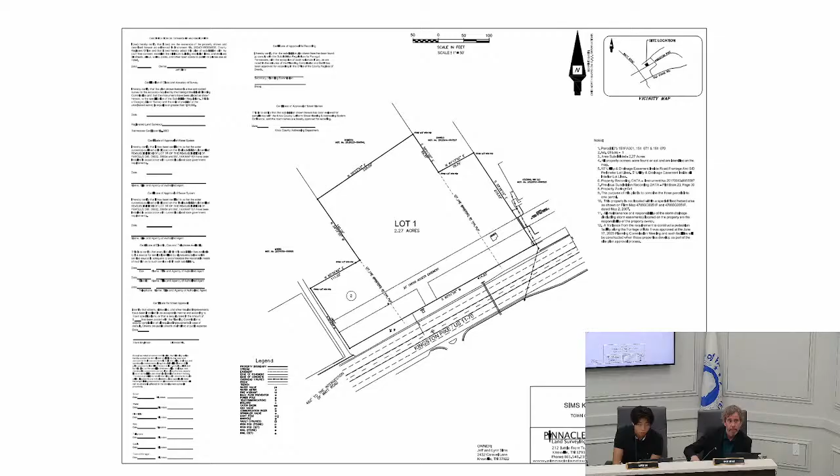Motion to approve. Do I have a second? Second. Is there any public input? No, ma'am. Any discussion? Yes, the owner is aware of what we're doing here? Yes, sir. Do you need him to come up? Well, as long as he understands it, that's all that matters. Do you understand what we're doing? Okay.

Any more discussion? All right, with discussion closed, all those in favor say aye. Aye. Any opposed? Motion passes.

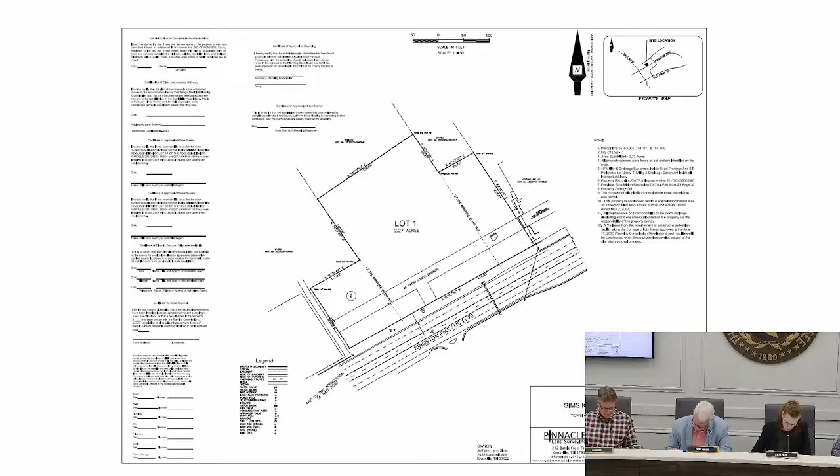Item 4B, discussion and public hearing on approval to extend fiber optic cable in a new 2-inch conduit within the right-of-way beginning at the northeast intersection of Kingston Pike and North Campbell Station Road, extending along the east side of North Campbell Station Road, boring under the road to the west side, continuing to Jamestowne Boulevard, and along the south side of Jamestowne Boulevard to service the property at 11507 Kingston Pike. Comcast applicant. That's a long caption for that item, but it pretty much describes what they're doing.

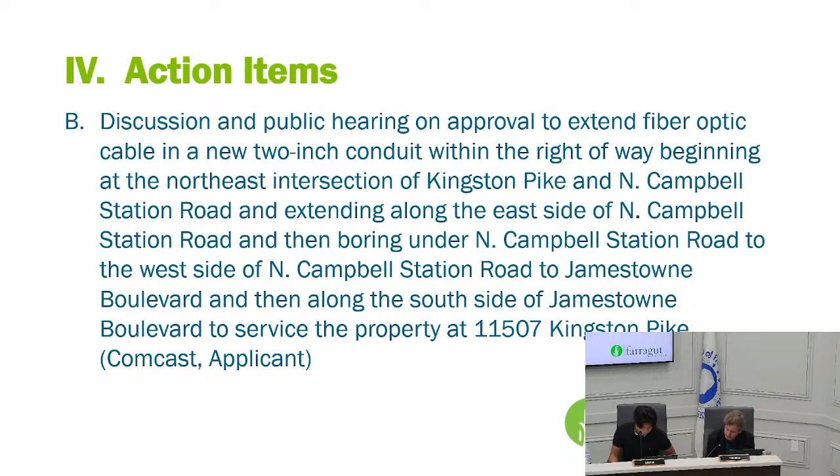Basically, Comcast, through Source Broadband as their installer, for whom we have a letter of credit, will be extending about 1,900 linear feet of half-inch fiber cable. It will start at the northeast intersection of Kingston Pike and North Campbell Station Road, go along the east side of North Campbell Station Road down near the Rural Metro facility, cross under the road, continue on the west side up to Jamestowne Boulevard, run along the south side of Jamestowne Boulevard, and come in from the north into the Village Green Shopping Center to service 11507 Kingston Pike at this time.

So the staff recommends approval of this project subject to obtaining a right-of-way permit through the town's engineering department. And I'll be happy to answer any questions if you have any.

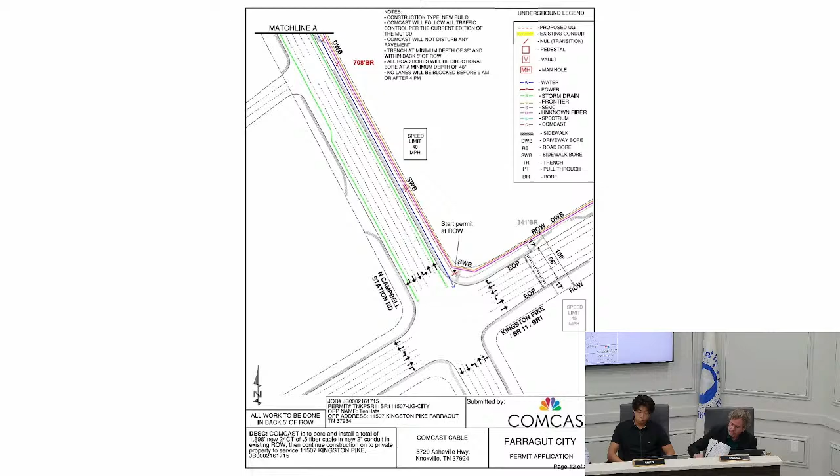Move to approve the item with the subject-tos. Do I have a second? Second. Any public input? No. Any discussion? Yes. Mark, have we used this Source Broadband before? Yes, we have, with good results as far as I know. Okay. Like I said, we have I think it's a $30,000 letter of credit, and any of these installers have to provide that before they can get a right-of-way permit, and that gives us the assurance that any areas that might be affected by their project get properly restored. Okay, just want to make sure.

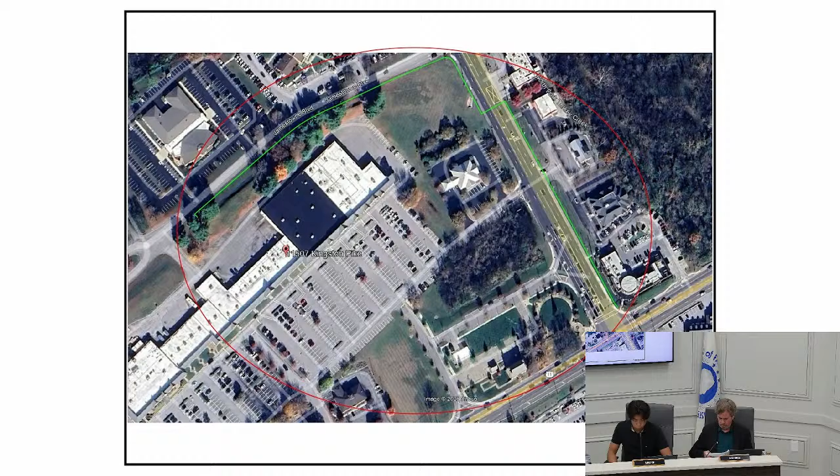Is that the complete discussion? All those in favor say aye. Aye. Any opposed? Motion passes.

Moving on to item 4C, discussion and public hearing on the approval to extend fiber optic cable from the west end of Boyd Station Road along the east side of McPhee Road to the entrance to the Grove at Boyd Station subdivision. Charter applicant.

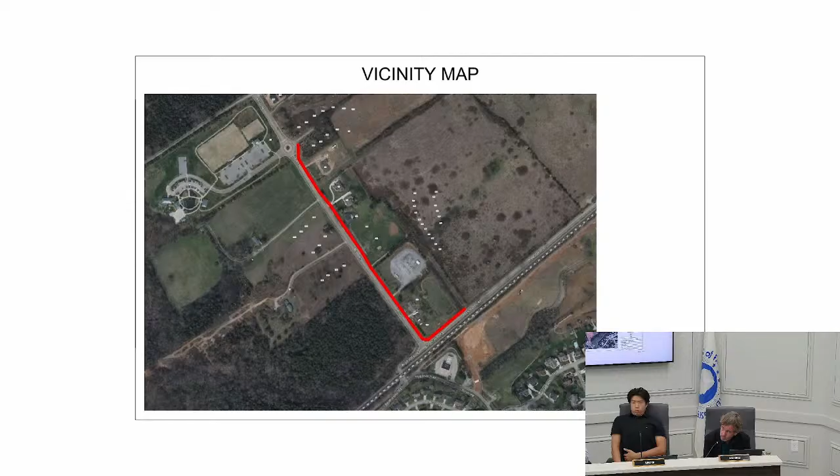This particular project will start at the northeast intersection of Boyd Station Road and McPhee. It'll come in on the north side of Boyd Station Road, then all this is in the right-of-way along the east side of McPhee Road, all the way up to the entrance to the Grove at Boyd Station subdivision. It's about 2,200 linear feet of fiber optic cable. This would be for Charter, using MasTec as their installer, for whom we also have a letter of credit. All this work will be conducted through directional boring.

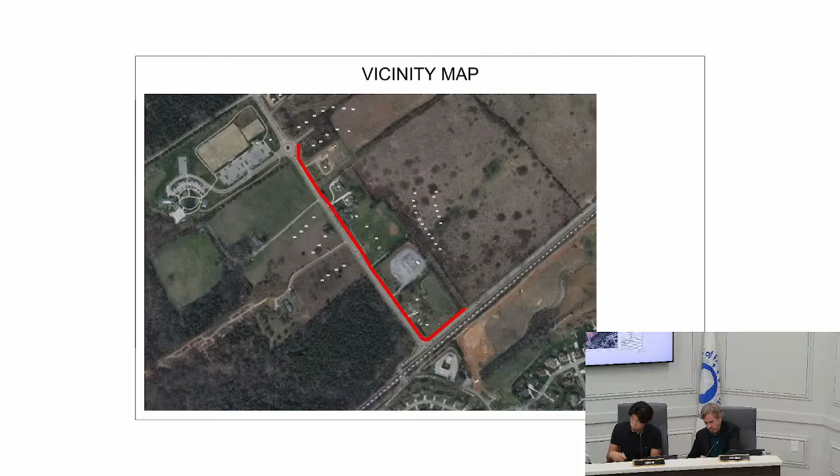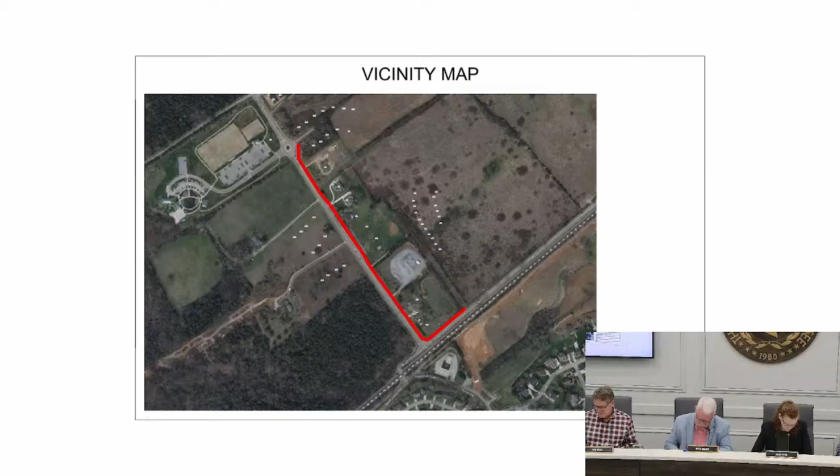So the staff recommends approval of this project subject to obtaining the right-of-way permit through the town's engineering department. Do I have a motion? So moved. Second. Do we have any public input? No. Any discussion? None. All those in favor say aye. Aye. Any opposed? Motion passes.

All right, moving on to, D's guns... no, yeah, E. D was E. 4E, discussion and public hearing on approval to extend a 4-inch gas main along the north side of Allen Kirby Road and extend a 2-inch gas main along Allen Kirby Road to service 12960 Allen Kirby Road, KUB applicant.

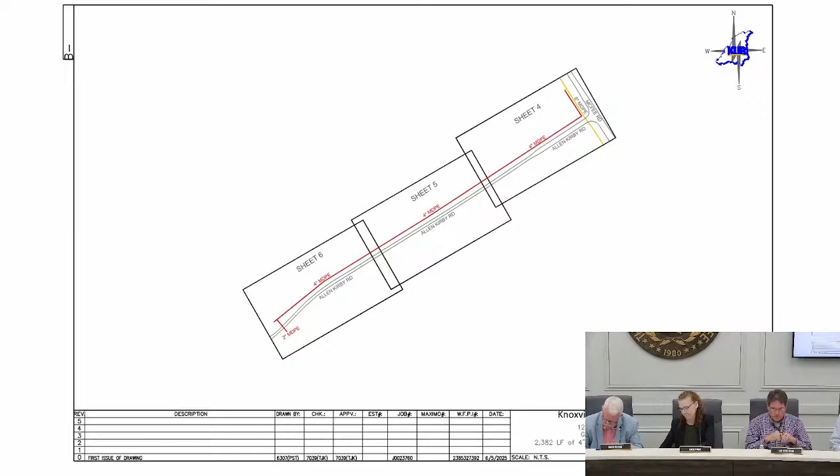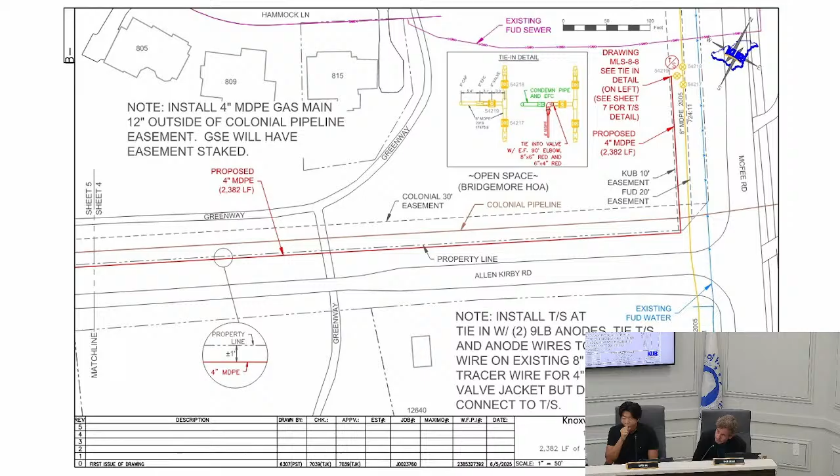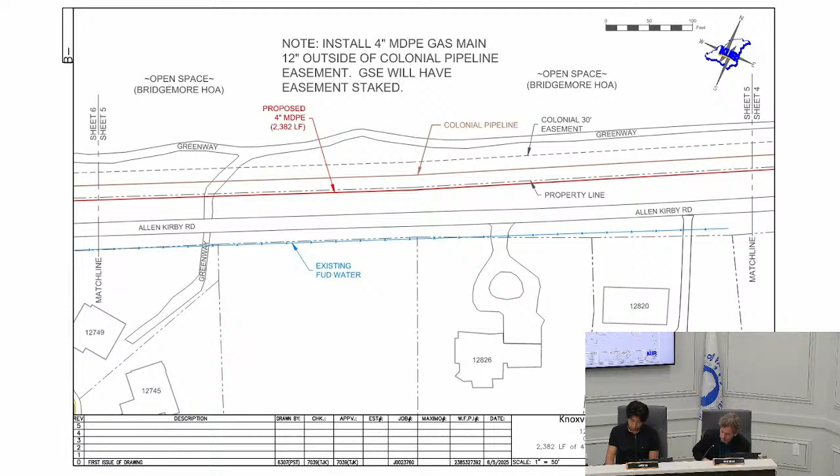Project is about 2,400 linear feet. This will be conducted entirely by KUB. They're going to start at McFee Road, kind of the north side, northwest intersection of McFee and Allen Kirby Road, then go west along the north side of Allen Kirby Road for about 2,400 linear feet, and then bore under Allen Kirby Road with a 100-foot bore of 2-inch gas main to service the property at 12960 Allen Kirby Road.

As I mentioned earlier, this is entirely going to be conducted by KUB. They are aware that they will have to coordinate this work with the Colonial Pipeline group because the gas line they're installing is just outside of Colonial Pipeline's 30-foot easement. I'm sure those two entities work together quite a bit, so I don't think that's going to be a problem.

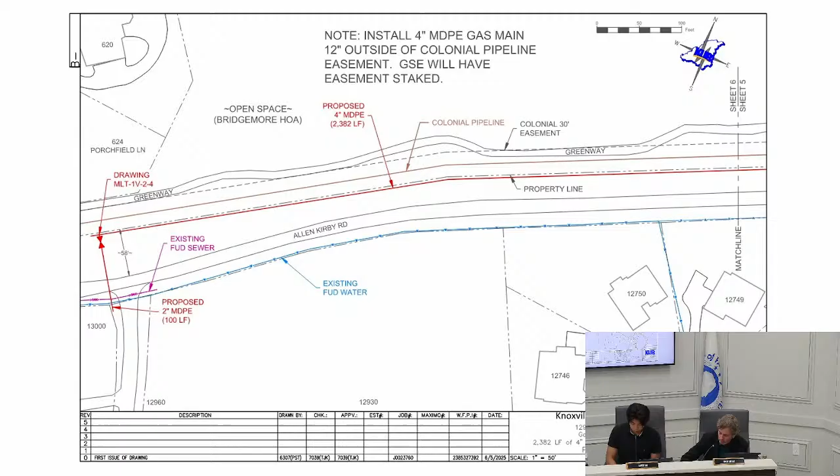So the staff recommends approval of this project subject to obtaining a right-of-way permit through the town's engineering department. Do I have a motion? So moved. Second. Is there any public input? No. Any discussion? None. All those in favor say aye. Aye. Any opposed? Motion passes.

The following item we have changed for discussion only. Discussion on a request for approval of a resolution to amend the major road plan to provide for context-sensitive street cross-sections for selected collector and arterial streets.

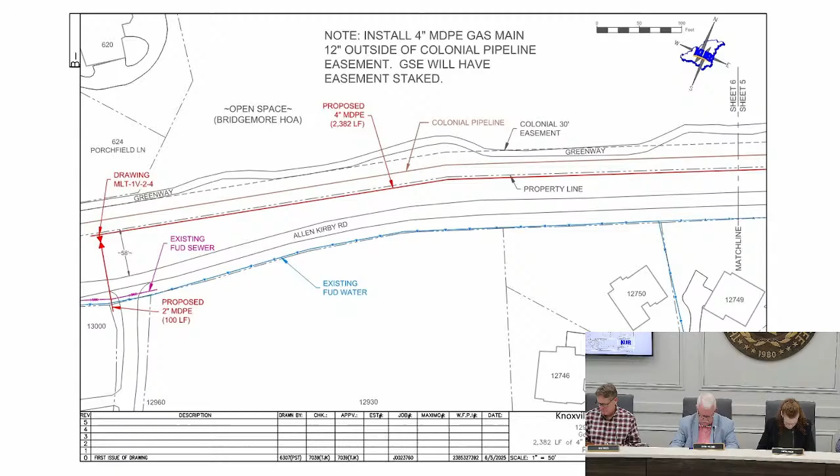And I'm wondering, Mark, should we handle this like we did the last time? We do it a road at a time. I know that there's some people here for certain sections, so. Yeah, it's up to you all.

I was going to give a little background on how we decided which streets to use, and then what really are the objectives we're trying to accomplish. We talked about this at the April Planning Commission meeting, and I discussed that these streets we're looking at were selected because they're either substandard or incomplete. In other words, they don't provide for all users of the transportation system. And these streets, other than Boyd Station Road, aren't part of any active, ongoing project that's in our CIP.

So again, I explained that the intent of what we're trying to do through this resolution is to guide a developer or the town, if we had a CIP project, on what improvements might be expected along these different streets should they ever be developed. We're not proposing to develop anything tonight, and that's not part of what this resolution is about. Basically, these cross-sections, if adopted ultimately, would replace the requirements currently in our subdivision regulations, and I'll show you what that would look like.

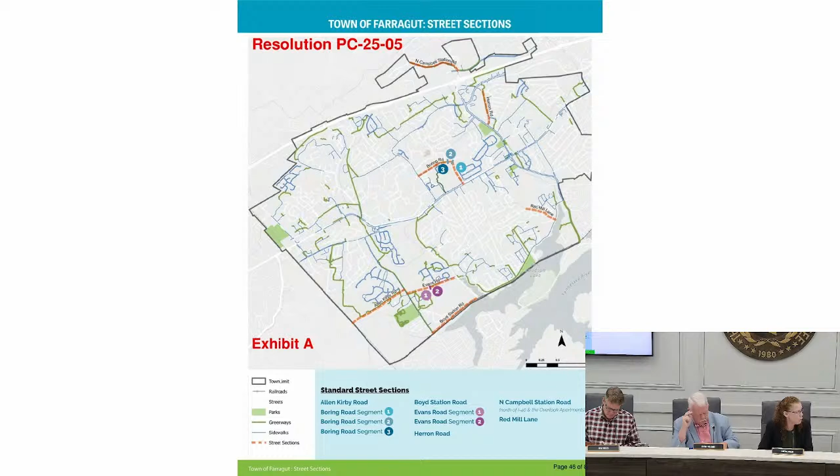They're what we used. Subdivision regulations are kind of the requirements we have in place for mostly the public infrastructure that may occur in the town. Like, what kind of street do we want? How wide does it need to be? Does it need curb and gutter, open ditch drainage, utilities, all those kinds of things? Your pedestrian facilities, your open space, how lots are created, all that is handled in our subdivision regulations.

So if somebody does a project either on an existing public street or develops a subdivision, they have to submit what's called a preliminary plat, and the requirements of that are in our subdivision regulations. That's basically construction plans for developing or modifying the public streets, the trails, the sidewalks, utilities, the drainage, all that kind of stuff.

Subdivision regulations is also entirely a planning commission matter, and it's required by state law that we have an adopted set of subdivision regulations. Yes. Okay, yeah. So I'd like to make a comment. In other words, for each of these proposed guidance diagrams we have here, there are already regulations on the books that prescribe how to do it. Okay? Yeah, that's correct. Okay. Yep.

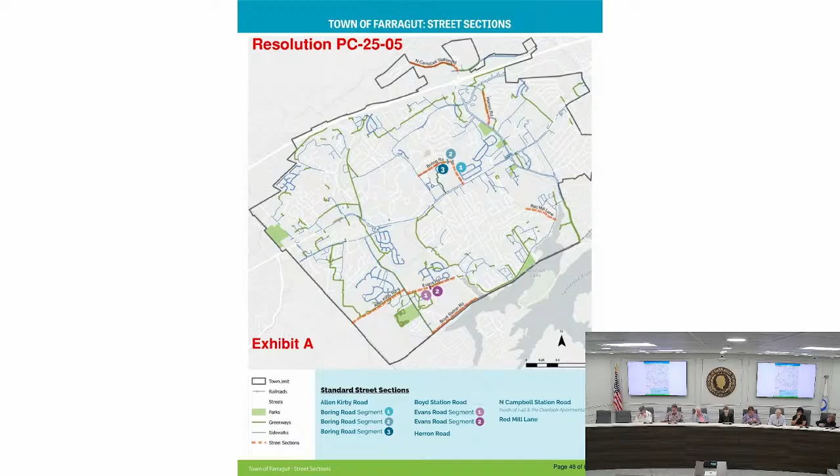So some of the goals, and we talked about this again in April, are consistent with the town's comprehensive land use plan and our strategic plan. One thing is providing for complete streets that are not just for motorists, they also accommodate other users. That's an important aspect of our community, it's what makes us marketable, and one of the most valued amenities we have. So that's something we are trying to achieve.

Functionality: looking at these streets and cross sections, instead of having a pedestrian facility on both sides of the road as required in our subdivision regulations, we looked at having a facility on one side in most of these, other than Campbell Station Road, and making it a wider facility, because a shared use path is more multifunctional. If you have baby strollers, recreational bicyclists, and things like that, a shared use path is more functional than a 5-foot sidewalk. So functionality is an important item of this.

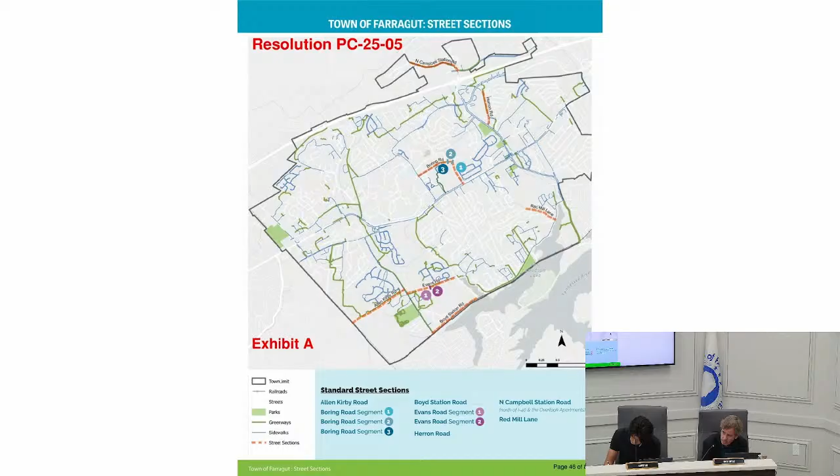Probably the most important thing is looking at the context of the setting. Most of these roads are in a fairly rural location. Instead of saying that if something happened on these roads they'd just be held to the requirements in the subdivision regulations, and I can show you what that would look like on one of the streets, we said let's try not to destroy the rural character of these streets, but still address the other strategies to some extent. It's kind of a hybrid.

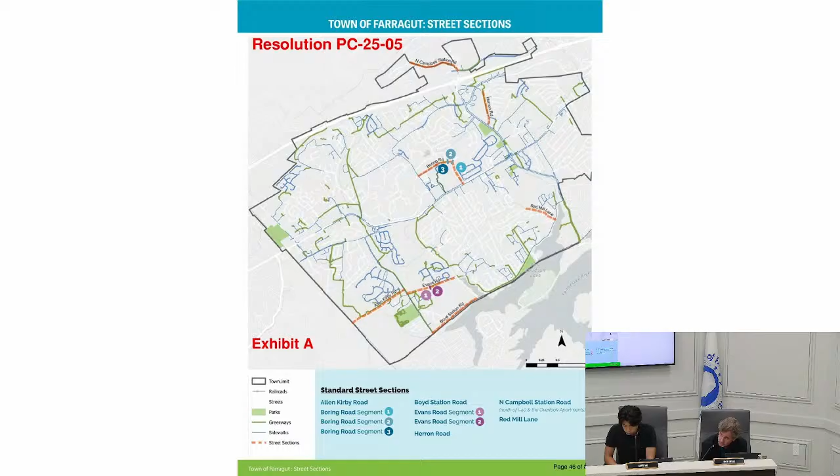What we looked at here is that most of these streets are not wider than 11-foot lanes, and they have open ditch drainage, no curb and gutter. They would have space between a shared use path and the edge of the street for street trees, to keep a tree-lined corridor through these sections. And finally, lowering cost: this would lower development cost and maintenance cost because you wouldn't have as wide facilities or as many facilities, and it would be far less impactful on the property owners along these particular streets.

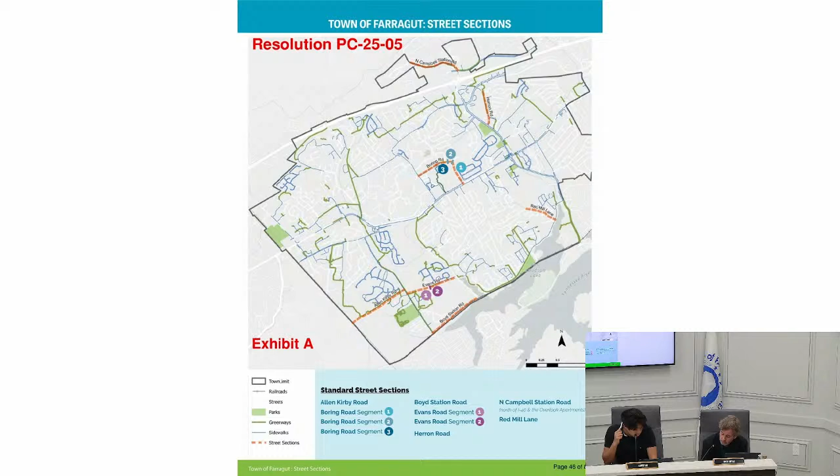So that's some of the broader objectives. I'm just going to go through these streets again real quickly to show you. We have some people signed up for this that we want to hear from, but the first street we're looking at is Allen Kirby Road.

There's about a mile of Allen Kirby Road that's unimproved and really substandard. If anybody's ever been on it, it's barely wider than a walking trail, frankly. So you're starting over in Loudon County looking east on Allen Kirby Road, that's what's in the upper image. The current condition out there is about a 14-foot street with open ditch drainage on both sides.

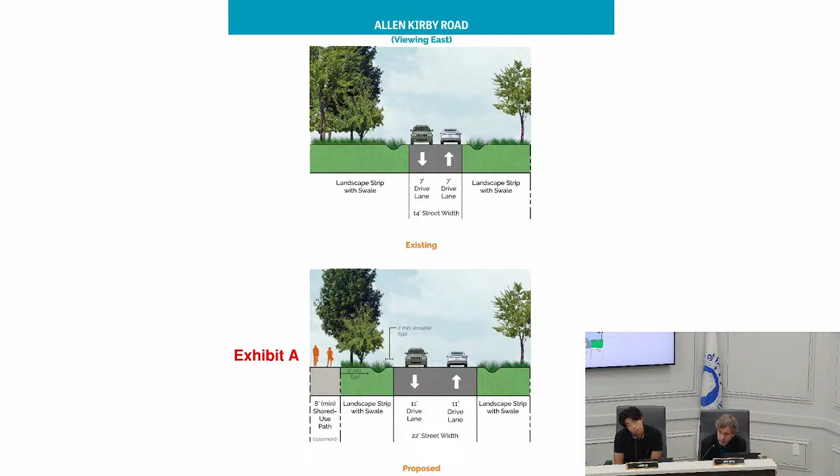So the proposed cross-section would be consistent with what the Bridgemore concept plan has for their portion of the Allen Kirby Road frontage, which is about 3,900 linear feet of the unimproved section. So that's what that would entail.

We'd retain the open ditch drainage on the south and north side of the road. There would be really no activity happening on the south side of Allen Kirby Road. It would all be on the north side, which is where Bridgemore has their existing walking trail, for example, further on the east end of Allen Kirby Road. So that would be extended on over to the end of Allen Kirby Road, and that's what's shown on the lower image.

So I can tell you this: if you're looking at that lower image, in lieu of what's on the bottom, the regular requirement would be two 12-foot lanes instead of 11-foot lanes, curb and gutter on both sides of the road, no open ditch drainage, and then a pedestrian facility also on both sides of the road, not just on one side.

You have that exhibit in here somewhere? I have it for Evans, yeah. You don't have this in your deck? It's a later slide, but I have it in front of me, and I would love for the folks to be able to see it.

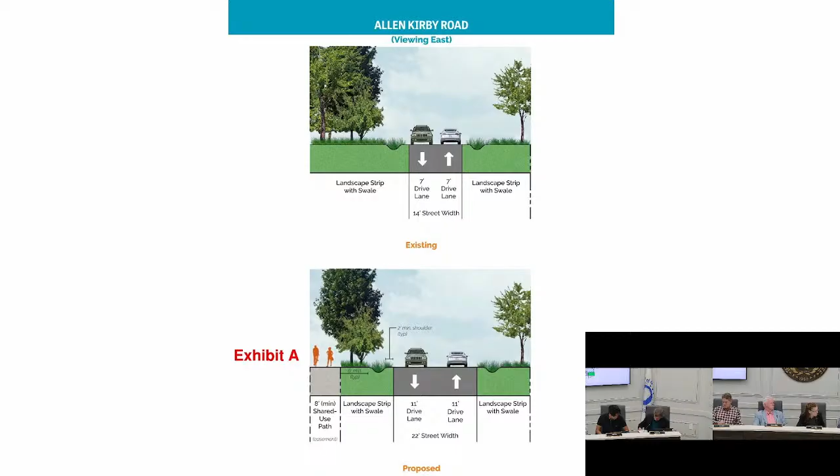So, as Louise was talking about, Allen Kirby Road, Evans, Boyd Station - all those are what's called a major collector, a major road plan. In the subdivision regulations, all these street classifications are laid out as to what the expectations are. And that's what you would have built without adopting context-sensitive cross-sections like we're recommending in this resolution.

So as I mentioned earlier, in the case of those type roads, you'd have two 12-foot lanes, curb and gutter, grass strips, a walking trail on one side and a sidewalk on the other side. And that's what McFee Road is right now, and Everett Road is.

McFee and Everett, yes. So in the subdivision regulations, if we don't move from what we've got, what we're looking at here, we would see McFee Road standards on Evans Road and McFee Road standards on Allen Kirby. I'm just trying to draw a picture for you guys.

What we're trying to do is reduce this and preserve as much of the character of these thoroughfares, and not do McFee and Old Stage and Everett Road again. We don't need to do that anymore. We know they're too fast. We know they're over-designed. We know it makes for a very soulless area that is great for cars to drive really, really fast and for people to feel unsafe when they're walking on those trails and sidewalks.

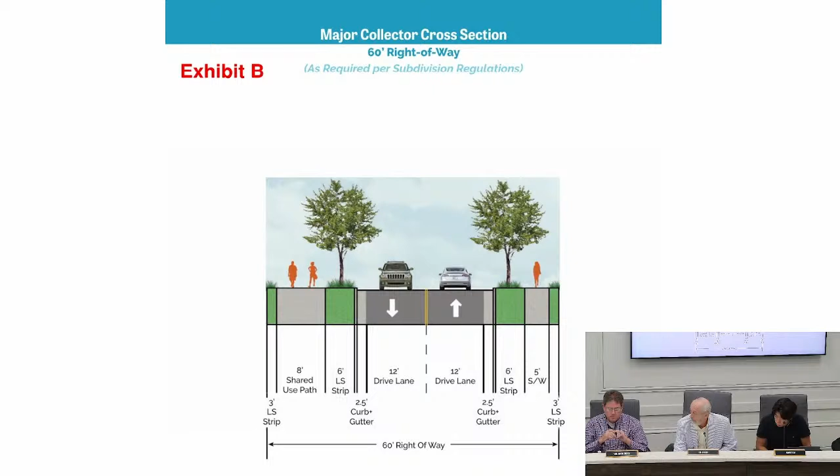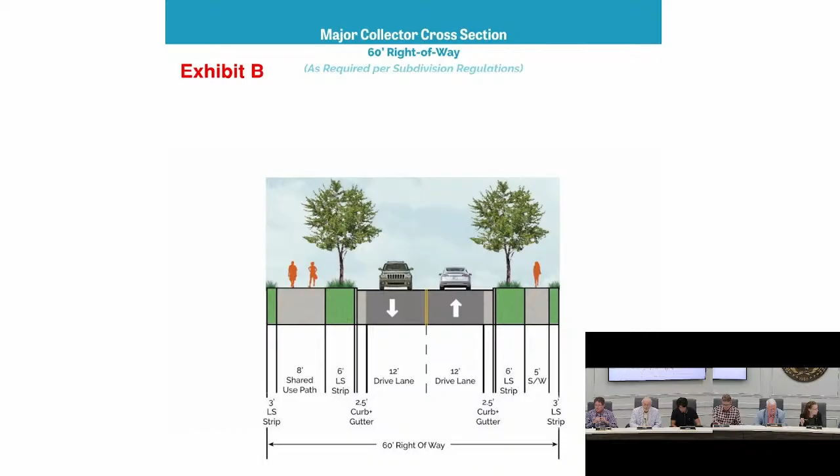I'd like to reiterate that this resolution does not initiate any changes, physical changes whatsoever. That has to go through a process of budget approvals. This is intended to be just setting up a different guideline, a different jumping off point from which you develop a preliminary plan, and then you bring the public in and everybody gets to take a look, and we can kind of pinch here or redo something here. That's kind of how the process has worked in the last several years.

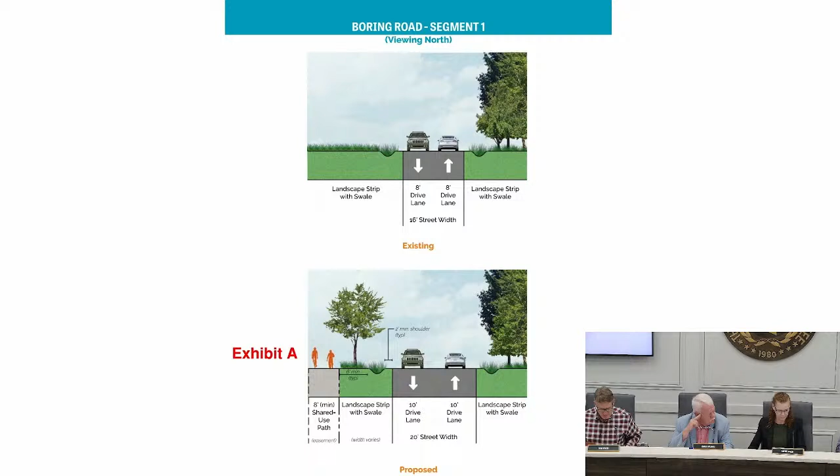Okay, the second road we're looking at was Boring Road. Obviously, Boring Road is undergoing a lot of change right now with the school and with the new subdivision out there. And this could also be changed if they end up closing the south end of it.

So these are cross sections looking at, if you started at the east end of Boring, southeast, Old Ingalls Shopping Center, going north. Currently you have about a 16-foot wide street, and what would be proposed there, in lieu of what would be required in the subdivision regulations, is two 10-foot lanes with a pedestrian facility on the school's property on the west side of Boring Road.

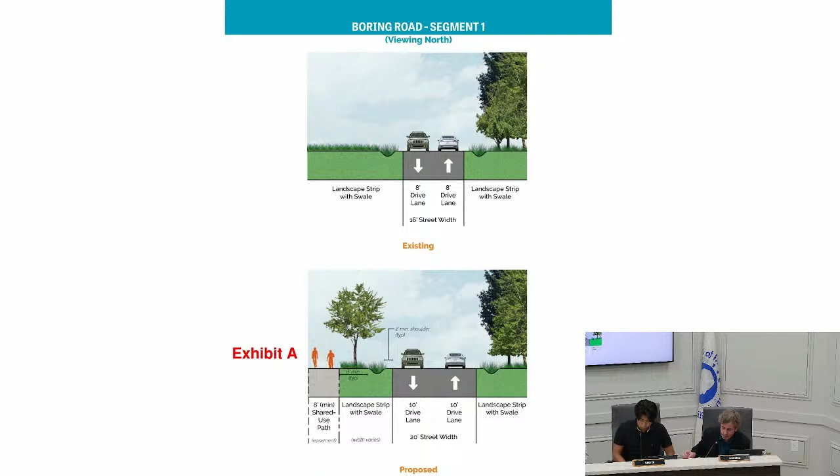So as you continue along Boring Road, you continue that on through the curve. And then this is the section on the lower part that the school would be constructing, up to their portion of Boring Road.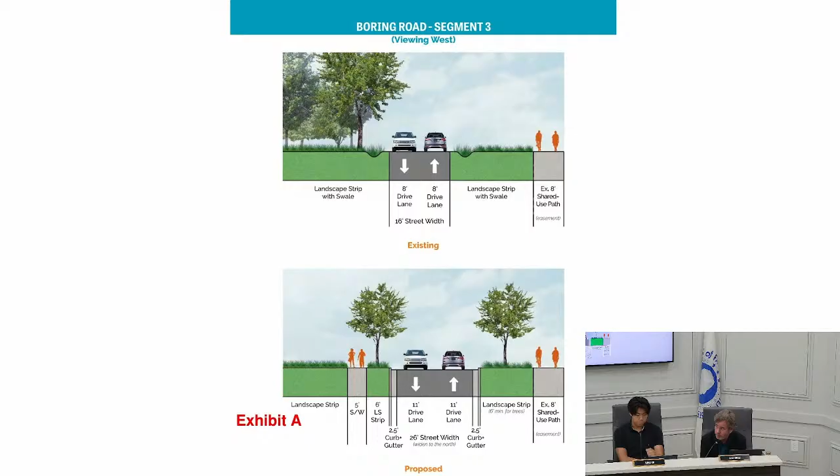And what they're trying to do there, although we recommended a lesser lane width than what they're probably going to do, is match the improvement that was made to Boring Road from Smith all the way across the frontage of Baldwin Park subdivision when that was rezoned and developed. That's two 12-foot lanes with curb and gutter and a pedestrian facility on both sides, pretty similar to what would be required otherwise for that street.

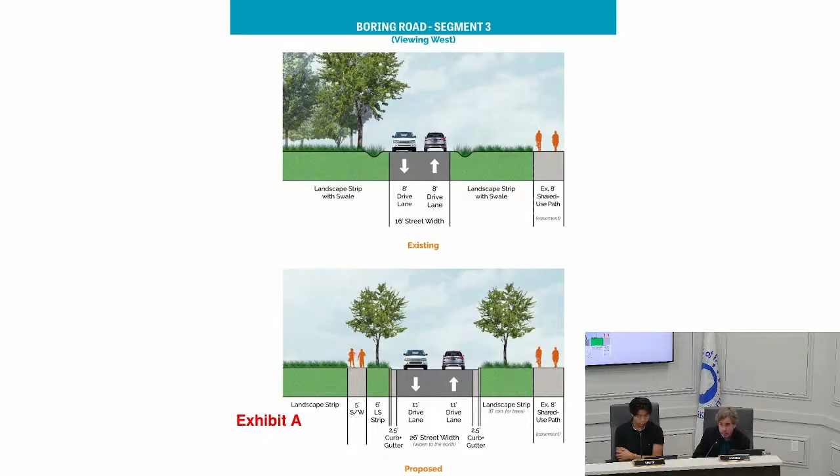So again, we took this back to the Planning Commission and asked the county if they could make changes to maybe reduce that lane width to 11, instead of two 12-foot lanes, have two 11-foot lanes. So that's what that particular section is showing. The next road, as I mentioned earlier, is part of an existing capital investment program project, and that's Boyd Station Road.

That's a long, straight road where we are going to introduce a roundabout at the entrance to the Grove subdivision on Boyd Station Road. Currently, that road is two 10-foot lanes. There's going to be a shoulder added, and a curb and gutter on one side, the non-railroad side, since everything's happening on the north side because the south end is railroad right-of-way. That curb and gutter is really just to direct the flow of water.

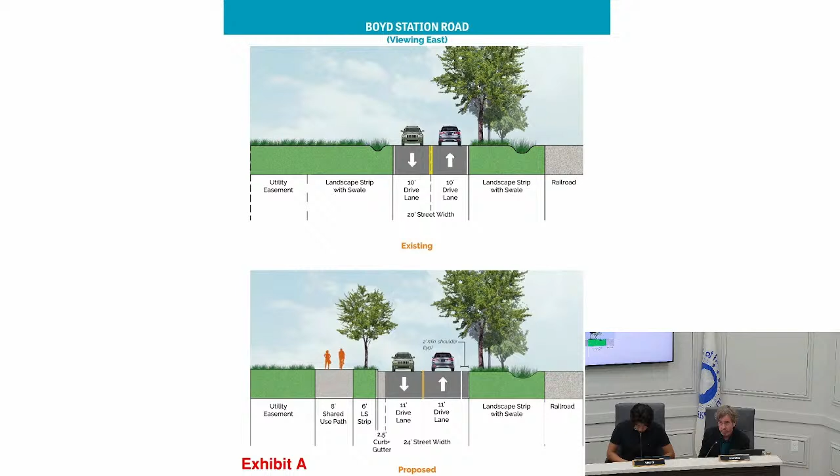Then we get to Evans Road. Evans is about a 4,200 linear foot road, with about 1,800 trips per day on it with the latest count I had. So currently, starting in the west part of Evans Road over at the Cottages at Price Farms and looking east...

you've got a road that's about 18 feet wide, two 9-foot lanes, with open ditch drainage. What we're looking at there is two 10-foot lanes, not substantially wider, retaining the open ditch drainage, no curb and gutter, and then having the pedestrian facility tie into the Cottages at Price Farms and extend east on the south side of Evans Road, crossing over to tie into the pedestrian facility that was constructed as part of the Farm at Willow Creek subdivision several years ago.

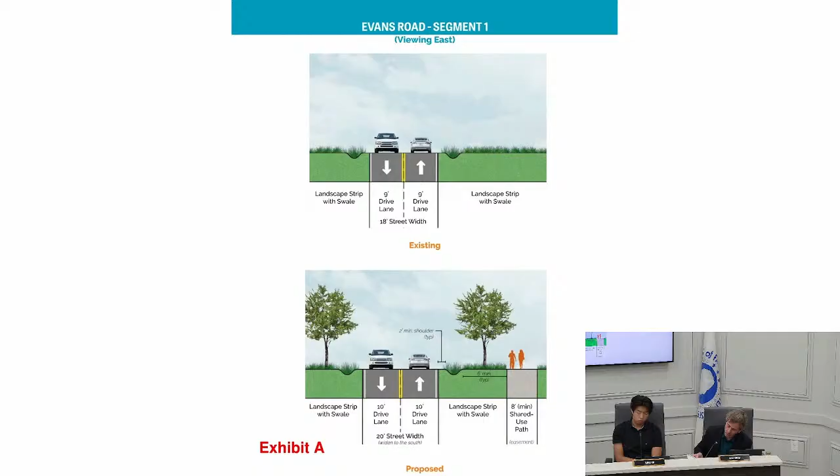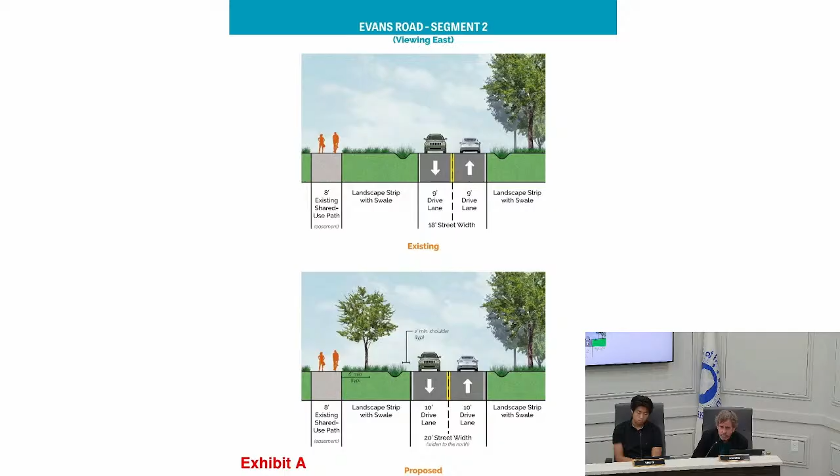So again, we're trying to look at some of the things that have been done in the past and maybe not do that again, and try to incorporate streets that are better and maybe a little safer, but don't over-engineer them to where you kind of invite people to drive faster than they maybe should. You're still providing for a more complete street, although you're not requiring a pedestrian facility on both sides. So it's kind of a hybrid between what's required and what you have now—something in between. That's a good example of Evans Road.

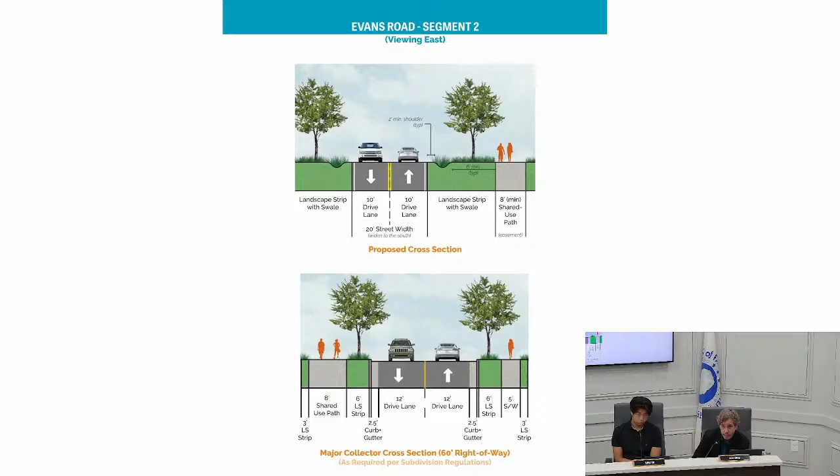The next road is Herron Road, and this one's about 1,700 feet that's unimproved. The reason this road was identified is we're not proposing any changes to the width of the road, just trying to incorporate maybe a sidewalk or trail on the east side of the road at some point. You've got Founder's Park on one end of Herron Road, crossing over to that road, and then the Turkey Creek development with a walking trail that comes into Herron Road at the very north end.

So trying to incorporate that, also in the parent responsibility zone for the school, because if you're trying to—I've tried running on Herron Road when I used to run on the roads, and it's not a pleasant experience. It's fairly narrow, and you just can't feel comfortable. So I think that would be a good amenity to connect those two developments, Founder's Park and Turkey Creek, and give people other options to get to and from those different endpoints.

Again, this one is not proposing any changes to the street width. I can tell you on a local collector like Herron Road, our current subdivision regulations would require two 13-foot lanes with extruded curb and a pedestrian facility on both sides of the road.

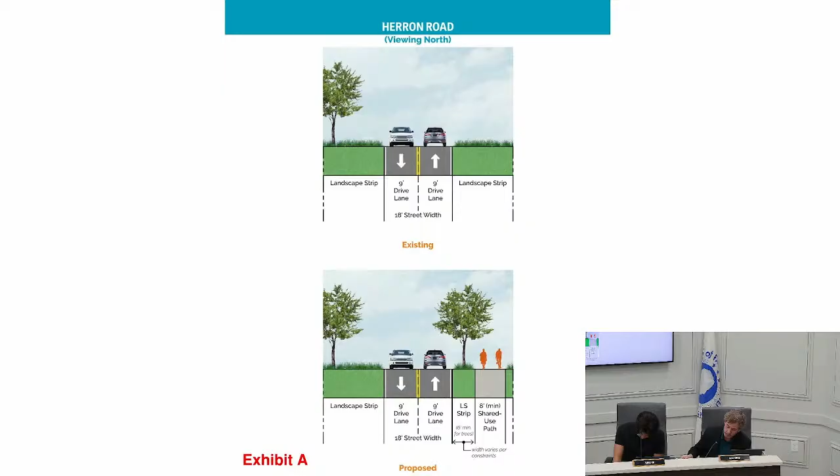The only arterial road on these cross sections is a portion of North Campbell Station Road, north of the interstate, north of the Overlook Apartments, as you go toward the end of the town limits at Ridgeland subdivision. This one has more of an impact because it has about 9,000 average daily trips, much more traffic than the other streets we looked at.

We do show pedestrian facilities on both sides here, although on the north side that's going to be in the county, and they may or may not ever have a pedestrian facility on their side of North Campbell Station Road. We've kind of started a facility on our side with the mini warehouse project—there's a walking trail that extends to the end of their property. As those properties on the south side of North Campbell Station Road develop over time, we would extend that trail all the way down to Fretz Road and tie into that part of the town.

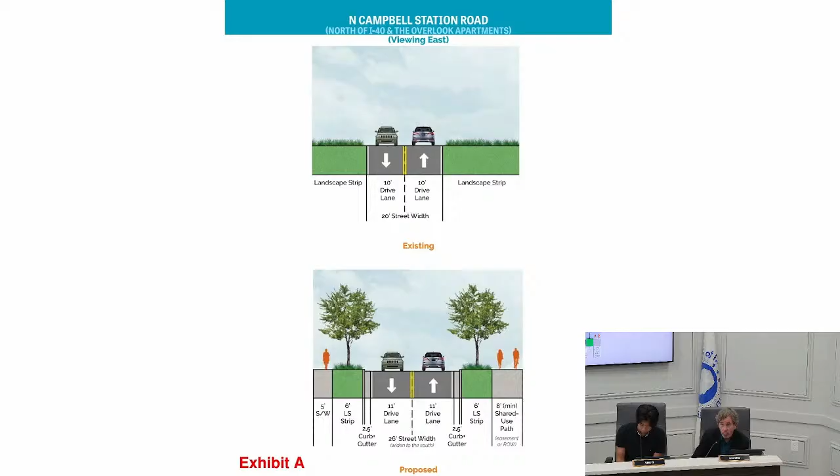So that's what is proposed for North Campbell Station Road, and again, that's a minor arterial. The other streets we looked at are collectors, and the last one is a minor collector.

That's Red Mill Lane. Red Mill Lane has a fairly high traffic count, about 1,250 from the latest count I have. It's about 2,600 linear feet, and the lane width is 12 feet per lane. We're not proposing to change that.

We're looking at maybe at some point there might be a sidewalk or trail on the east side of Red Mill Lane, because there you've got Turkey Creek Road, you've got Anchor Park, and that has a sidewalk along Turkey Creek Road. If the Biddle property were ever to develop to the north and there be a connection to Red Mill Lane, having a pedestrian facility to connect that ultimately down to the sidewalk along Turkey Creek Road and Anchor Park would be a good amenity.

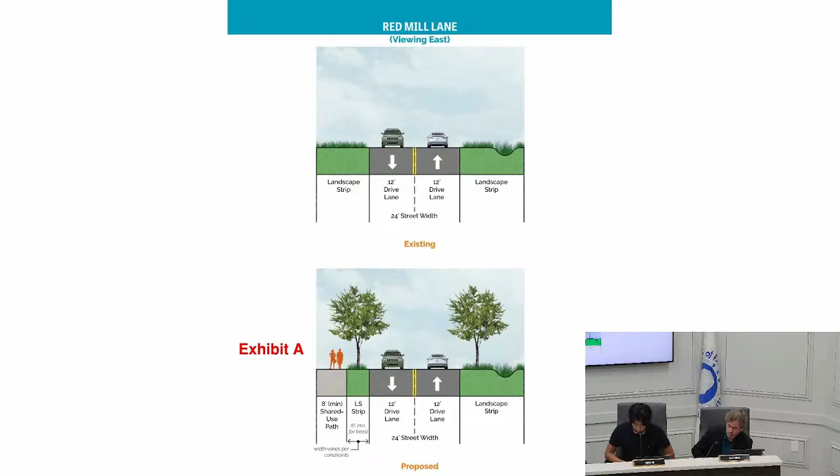So that's the only change with that particular road. I could tell you again, on this one, if you went by the subdivision regulations, you'd be looking at two 13-foot lanes, curb and gutter, and a pedestrian facility on both sides of the road. So again, we're just trying not to over-engineer these roads, trying, as much as we can, to retain the rural character.

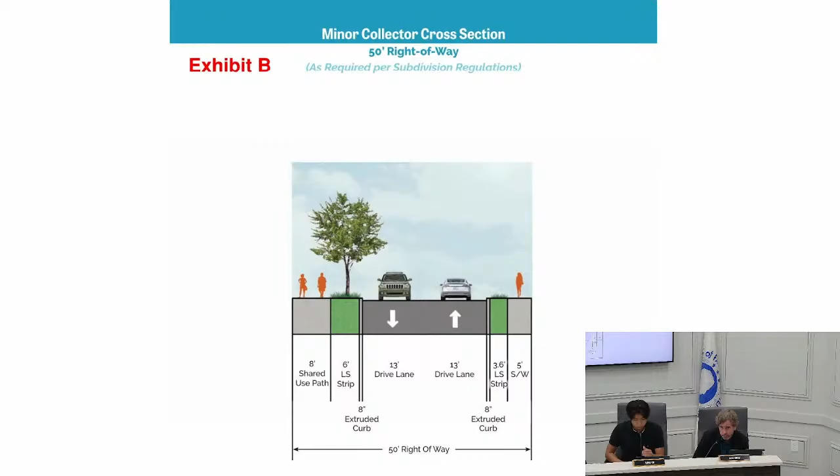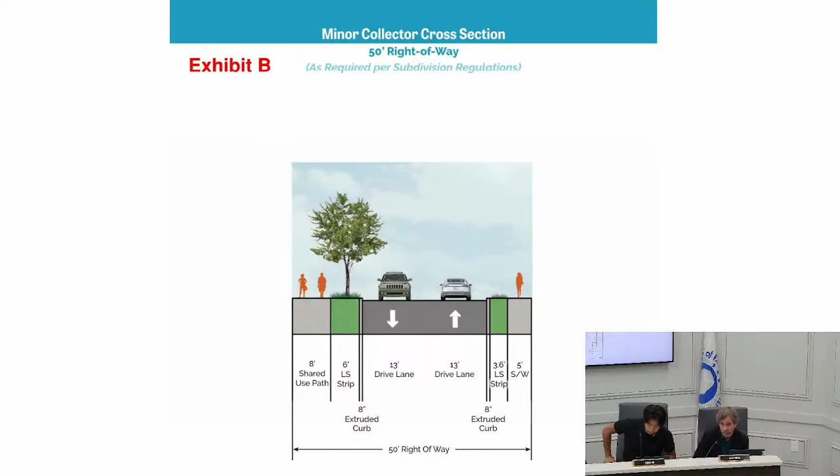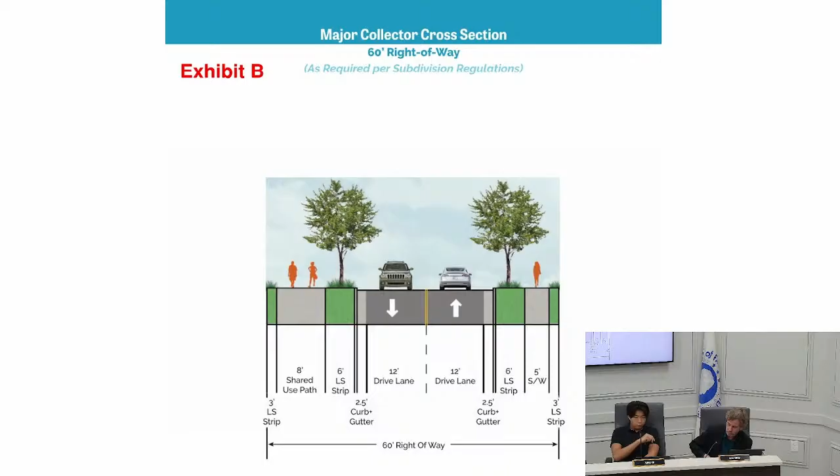So these next three cross-sections are going to be kind of a rehash of a lot of the things we've talked about. The minor collector—this is what's required right now in the subdivision regulations for streets like Herron Road, Red Mill Lane. If they were to develop, this is kind of what you'd be looking at. The major collector, that's one we just looked at in relation to Evans. You've got 4 streets that fall under that, part of this resolution: Allen Kirby Road, Boring Road, Evans, and Boyd Station Road. That's what you would get with the current subdivision regulations, that type of cross-section.

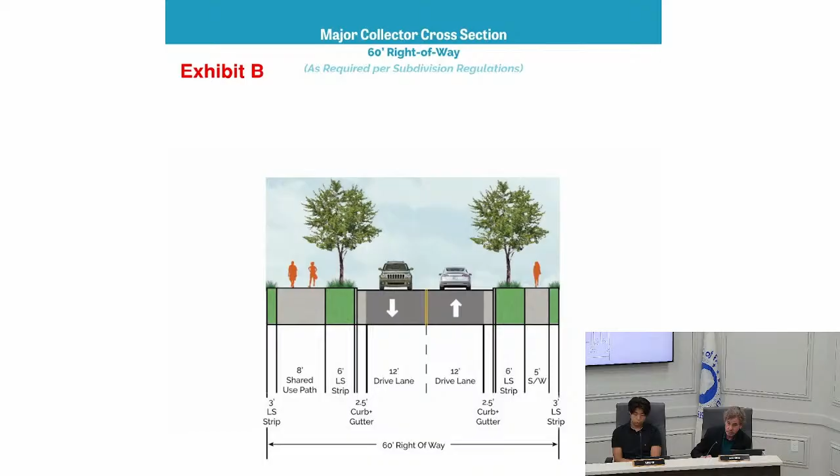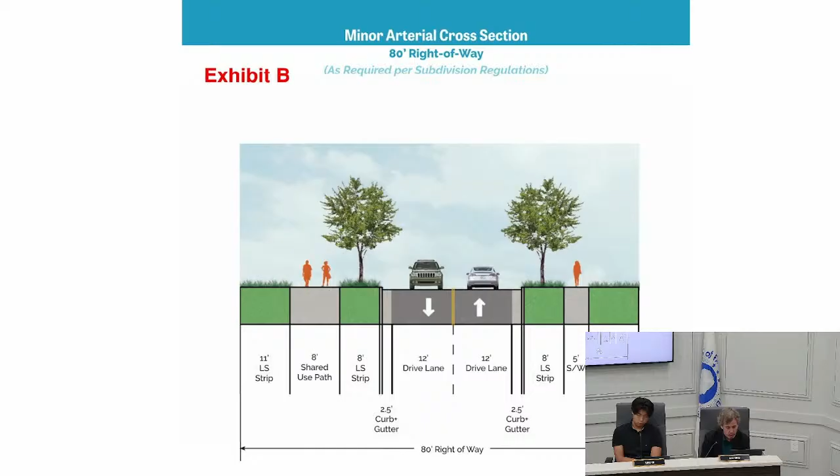And then finally, the minor arterial that we have, which is North Campbell Station Road—that's what would be required for that particular road, a little bit wider lane widths than what we're recommending in this resolution. So that's kind of a summary of what this is about.

Again, this is a discussion item only this evening, and I do have some people that have signed up. If any of y'all have any questions of me before that, I'd be happy to try to answer those.

I do want one piece of clarity. I know that there's concern—these cross-sections are presented as a jumping off point. They are not set in stone. Like some of these where we have a shared use path, that's the goal, we may end up with a sidewalk, we may end up with a sidewalk back of curb, if there's trees and things that make it difficult for us. That's all part of a discussion.

When a preliminary plan comes out, we have community discussion. These cross-sections are intended to be a jumping off point to start a preliminary plan so that we can bring the community in and work on it—that's kind of how we've been working it lately. That's absolutely right. This would be the cross-section, the typical one. That doesn't mean you can't make some adjustments to it, but it does mean you're looking at the context and not just going by the strict requirements in the subdivision regulations.

So your starting point is a much less impactful cross-section than what you would otherwise have. And then you could still make tweaks to that, working with the property owners on these different roads. But the fact of the matter is, the town has grown by 20,000 people since our incorporation.